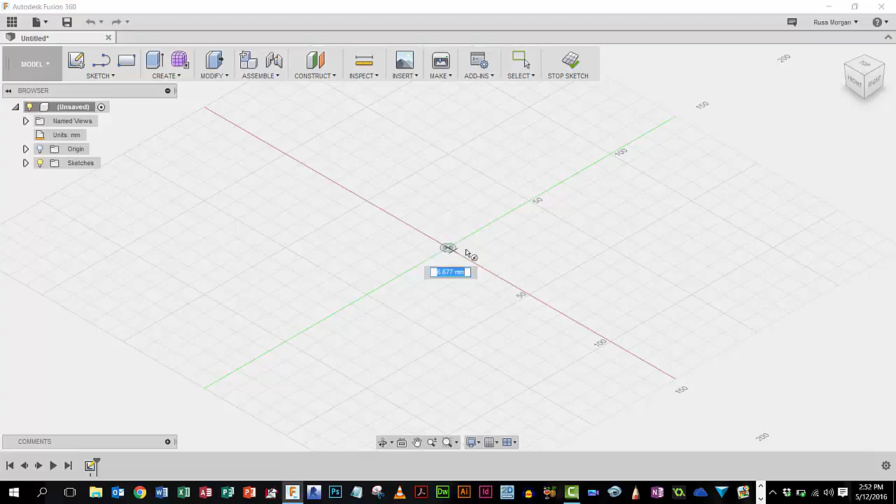So I'm going to start off with a cylinder. I'm going to choose this bottom plane and go for that center position, and make it about 12mm diameter, press enter, and 20mm in height.

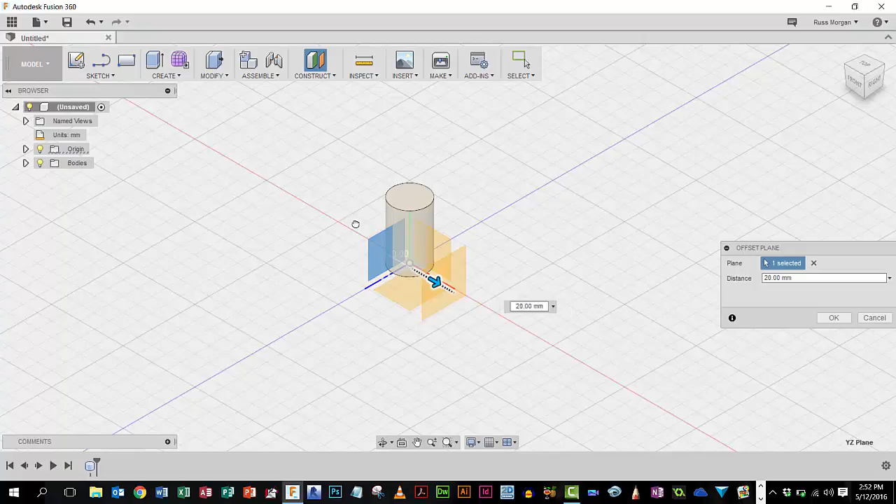All I'm going to do now is put a little hole in the side of it, and to do that I'm going to use something called an offset plane. So I'm going to create an offset plane here. Where do I want to offset it from? Well, I need to get my origin on. I'm going to go from offset from here, and how far out? Well, just so I'm further out than the bottle, than the cylinder.

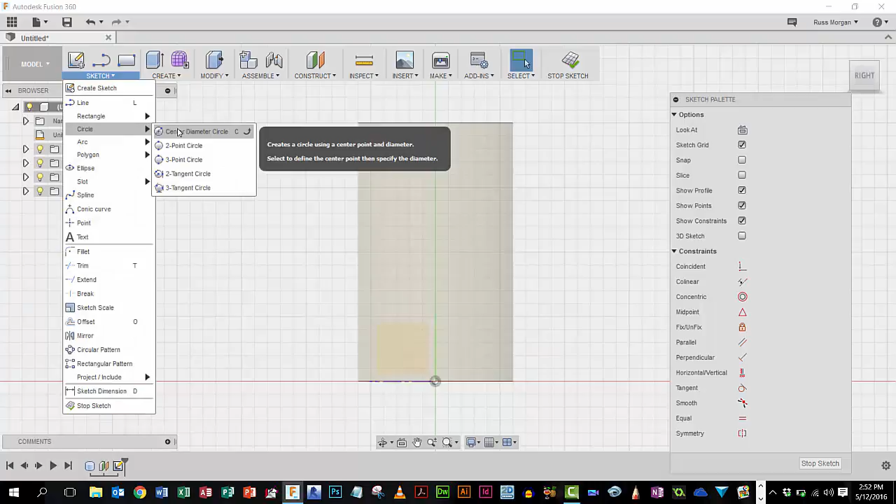Say OK, and I'm going to put a sketch now onto that plane. It's going to ask me where, I want to put it on here, it squares it up for me. Now I'm going to zoom in, but although that offset plane didn't look as big as this, it'll be on the whole area of it. I'm going to go for a circle with a diameter, and put mine roughly there, pretty much the middle on that green line.

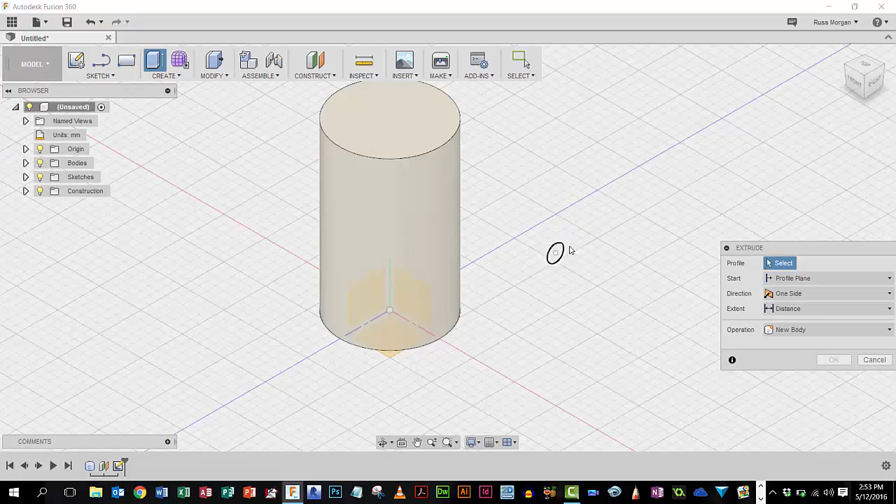And I'm going to make mine 2mm, and stop my sketch. Now if I go back into my 3D view, you can see I've got this hole which looks like it's floating in air, and my bottle's over here. So what I want to do now is extrude this hole in the direction I want to go into. Now you can see it's gone red. If I turn it so I can see the front view, I can see how far that hole goes in.

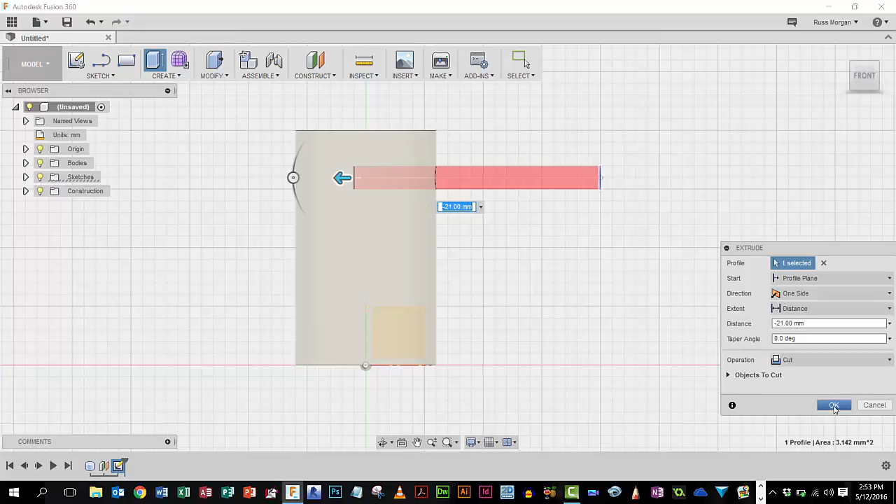Now remember, in reality there would be a hole that comes right the way through the middle here, which connects the tube to it, but we just want to give the appearance of having a hole at the moment, so that's good enough, it's gone in far enough. I'm just going to say OK, and that will have cut out, if I go back to 3D, that whole view.

Okay, next thing I want to do is put a kind of a finger type shape on the top of that button so it's not completely flat.

Easiest way to do that is to use a second cylinder and put one on top of the other. So I'm going to create another cylinder. This time I'm going to put it onto a different plane. I'm going to do it on this side one, and put it over here somewhere.

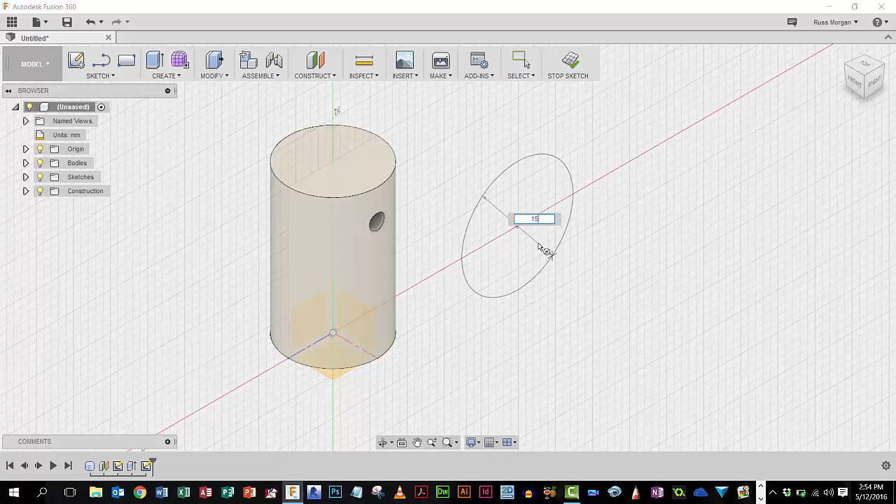15mm diameter. No, I'm not, that's too big. Maybe try 10, see what that looks like. Okay, press enter, and so long as I make this longer than the width of my cylinder, I'm okay. So I'm going to choose that.

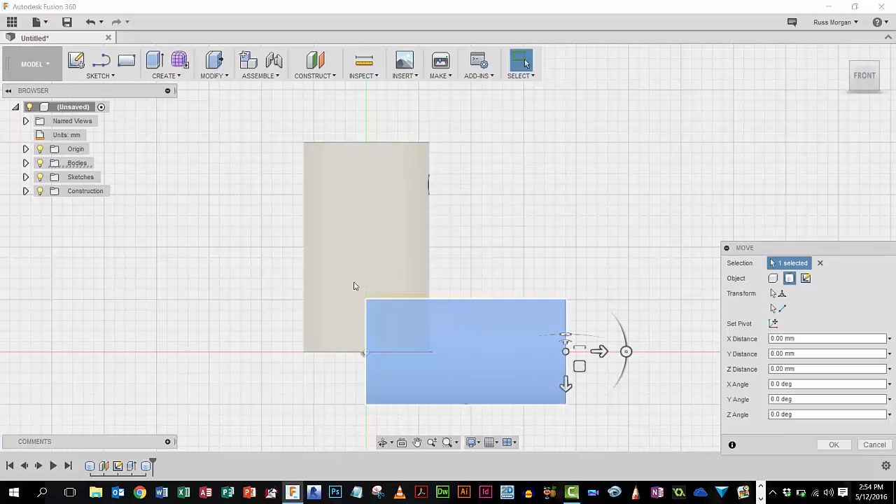Now what I want to do is move this one and sort of push it through that one. So I'm going to go for a side view so you can see where it is. I'm going to highlight it, and go move. And when I move now, I'm going to push this thing up, and push this thing across. Okay, and I want to check it in my other view.

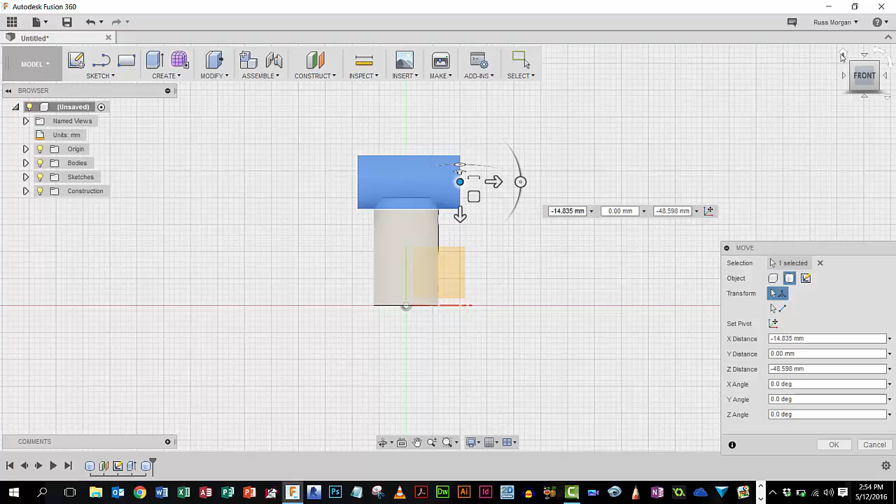Okay, so you can see now it's way off over here somewhere. I want to bring this thing right the way across over here somewhere. I will just check it in my other view again. Okay, so it's gone right the way through, perfect. So I say OK to that.

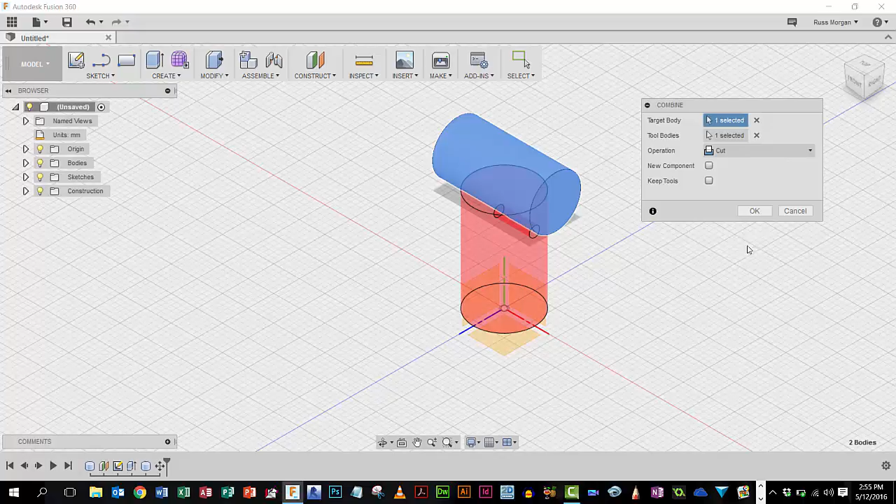So it looks like the one thing's fused into the other. All I want to do is highlight everything, and use something called combine. Here it is. Before I click OK, I just need to make sure that this is set to cut, so it's going to cut one shape from the other shape. Click OK. It's done the wrong one.

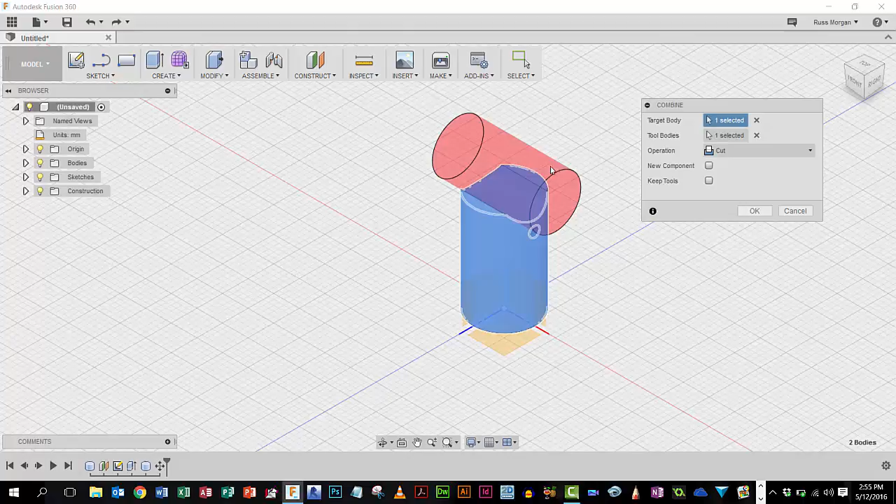I'm going to Control Z that, and make sure I select it the right way round. So I'm going to select it from top to bottom, and try the same thing. I'll do a combine as a cut. Now target body, these are the things I can switch around. So if they're the wrong way round in a minute, you can see that this one's red now, it's showing me this is done it the right way round. I'm going to click OK, and that's taken away that shape now.

So that could be the press button part of my top of my bottle.